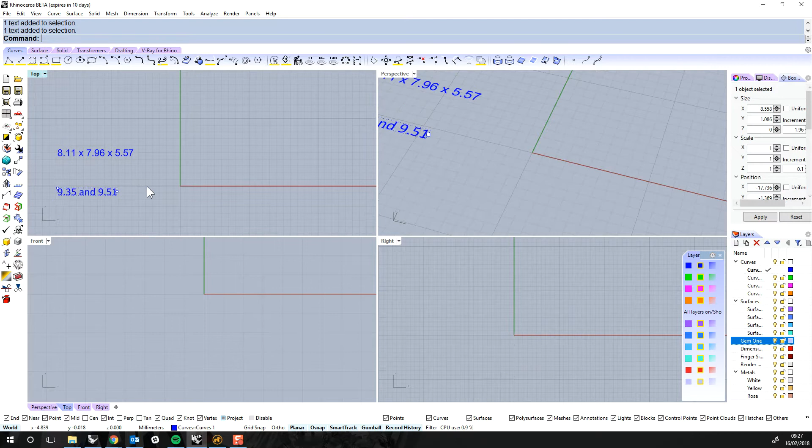So I've got this job here. I need to make a design, a ring with this Asscher cut here. So I've got the length, width, and depth, and I've also got the diagonal measurements. So it's quite a decent gem, it's about 3 carats or so. Let's start with a rectangle. And I'm going to go for 7.95, 8.1, and let's pop that in the center.

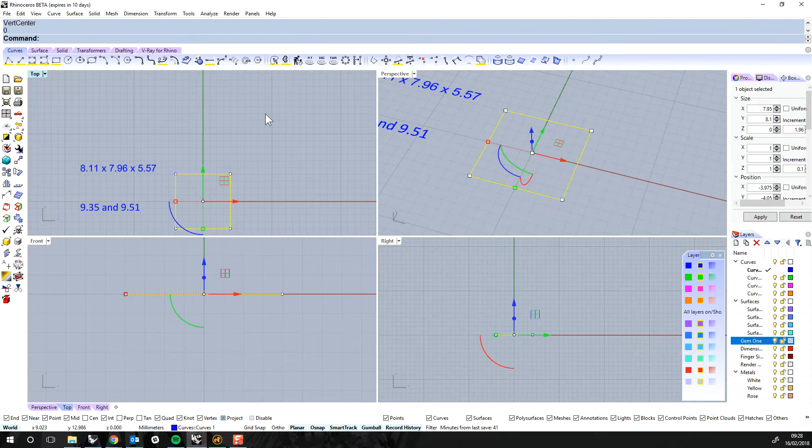And another way of doing that, that's just my little shortcut, is just hitting align. And you want to align to the horizontal center at 0. Hit that again, vertical center at 0. So 0 is just an easy way of saying that's the world origin. So 0, enter, is the world origin. And that's where those 2 lines, or 3 lines, all converge.

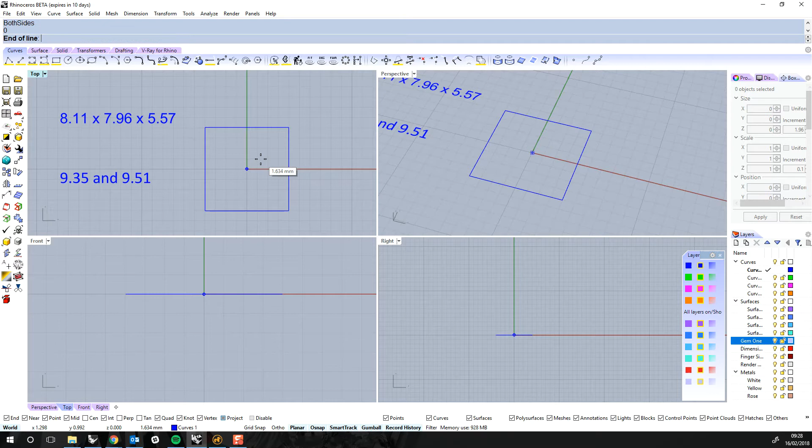Let's grab our diagonal measurements. Line, both sides, and again come from 0. And I want to snap to those corners there. Now 9.35, I only want half of 9.35, because I'm only drawing from the center out. So 9.35 divided by 2, and that saves me the mental drain of having to figure out what half of 9.35 is. Let's hit that there. You can see it's actually 4.675 millimeters.

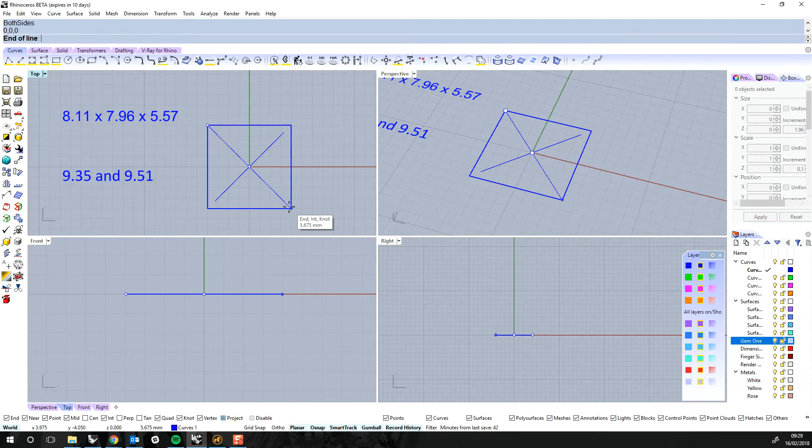And again, we can check the length of that line, 9.35 millimeters. Perfect. Again, line both sides from origin, 9.51 divided by 2. And we can bypass that. You can see if we hover over that, it gives us the tooltip saying if we right click, it's going to give us the line both sides option. So right click. Now my ortho snaps are set at 45 degrees, so if I hold down shift, it's going to constrain this line to 45-degree angles.

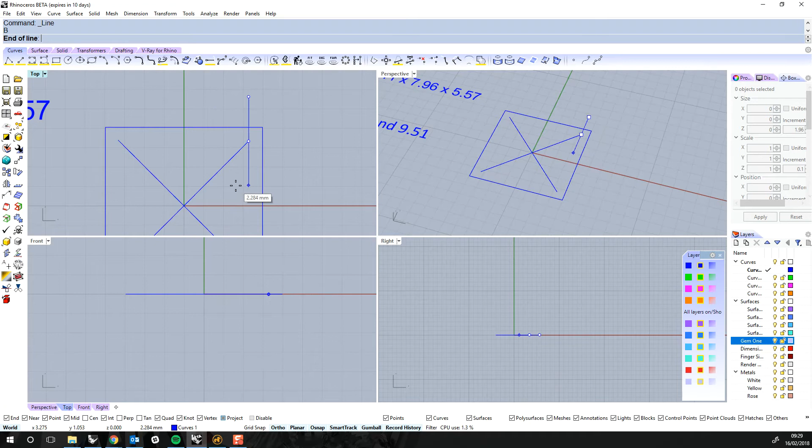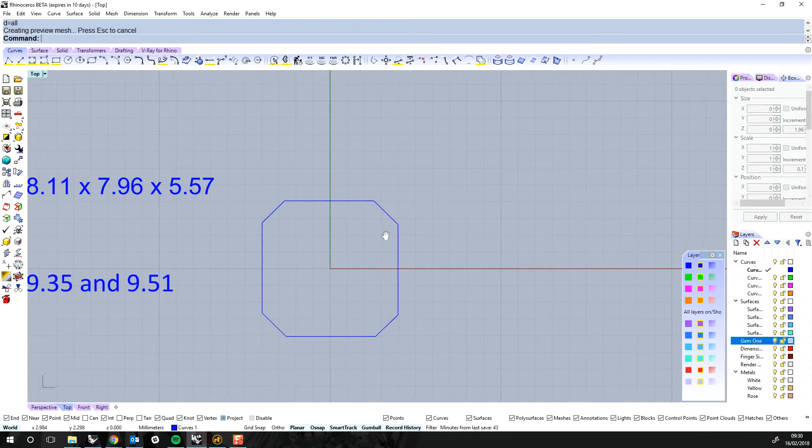Let's do that for all of those end points on those center lines and get rid of those 2. And we can trim these off. Trim, trim, trim, trim. That gets a bit boring after a while. So we can just cheat and grab curve boolean, and it says click inside the region you want to keep. I want to keep that. It says enter when you're done. I'm done. Enter. And that's going to trim off all those excess bits hanging outside of that area that you want to keep. Also going to join that up into a nice continuous polyline. Grab our properties here. That's a nice closed curve.

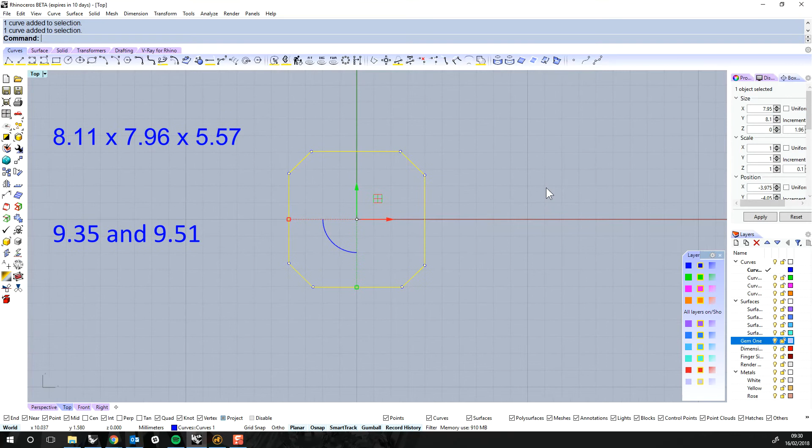And again, let's go back to our box edit. You can access this by right clicking any one of these tabs. You can see the options that you can have pop up. Box edit's one that I always have up. Nice easy way of just grabbing a quick dimension on whatever object you've got selected in your scene. Okay, so 9.35, 9.51, we know that the corners are in the right place.

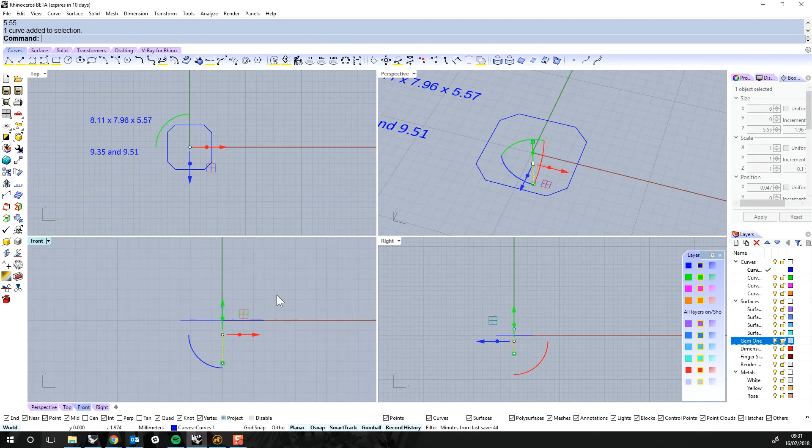And I have a depth here of 5.55. 5.55. Enter, and again hold down shift to constrain that vertically. Now that has missed. 5.55. That's better. And we'll drag that up. Sorry, that previous one had missed the world origin. I'm not sure why.

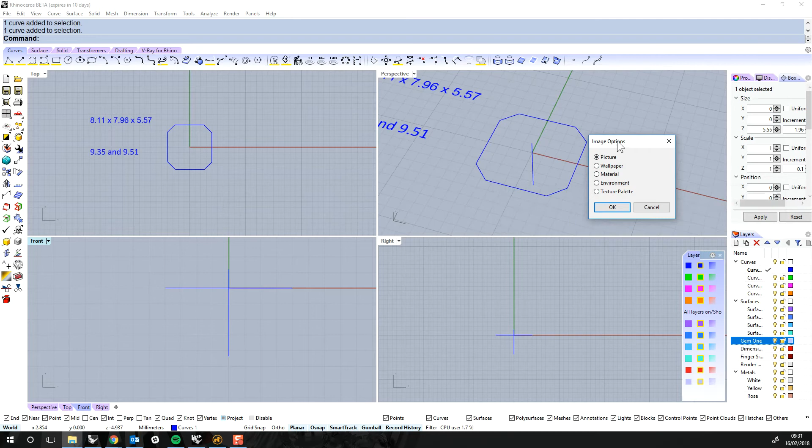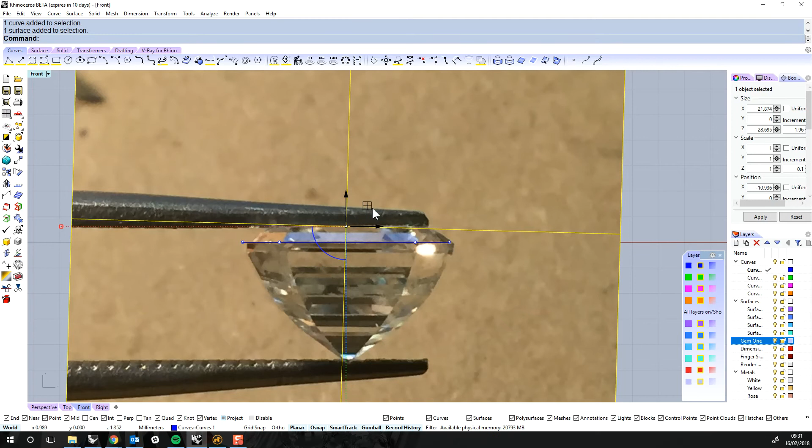And I do have a side image of the diamond here. We can just drag that in as a picture. And there it is. Move that into place. Give it a little rotation. Straighten it up. And I'm just trying to get the image to line up with that line. That looks pretty good to me.

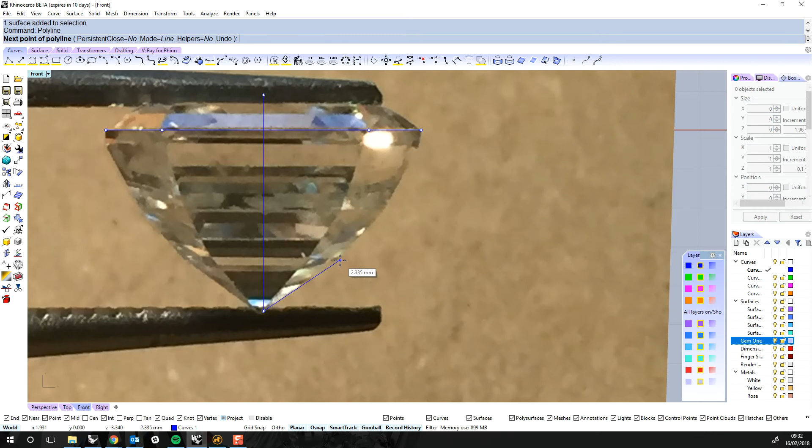When you look at this photo, you can see there's 1, 2, 3, I guess 3 pavilion facets here, and maybe 1, 2 on the top. So this time we're going to go with polyline, P-O-L-Y, and you can see it's auto completed for me. Grab this culet. That's the first facet, second facet.

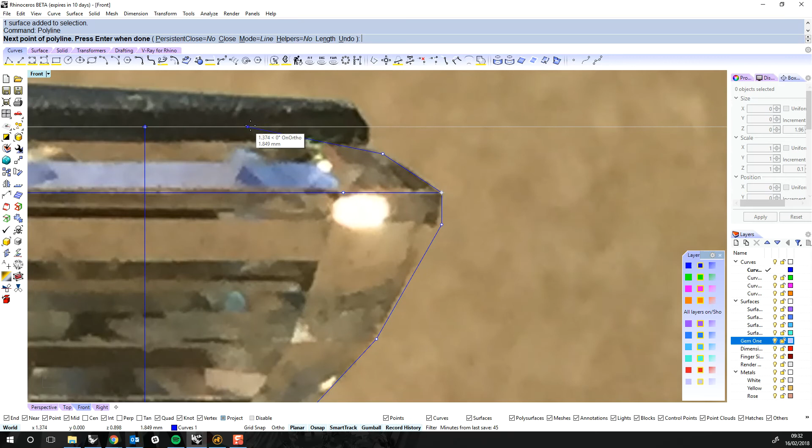Now I've got my smart track on here. If I hover over that point there, it's going to turn white. That means I can just drag a line down. That's going to be constrained to a nice 90-degree angle. Take this over here to that facet, and again to about there, and close that up. We can delete that, and we can see that this profile here is 5.55 millimeters.

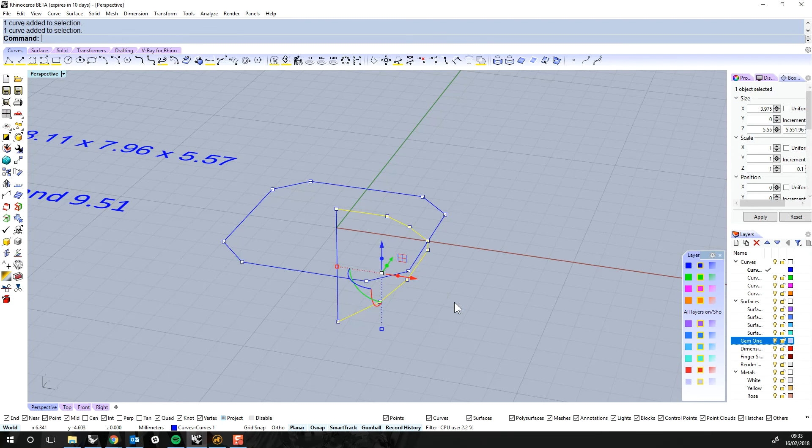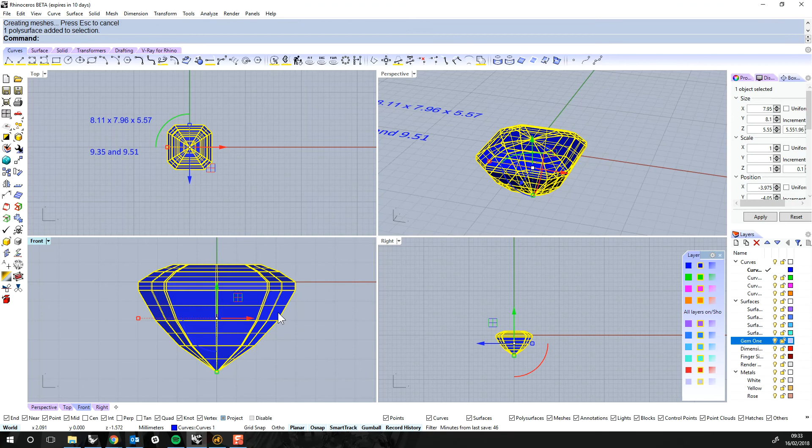So how do we get a gem from this? Okay, well we've got our outside curve, we've got our profile, and we just want to do a rail revolve. So rail revolve, select profile curve. This is this one here. Select the rail curve, this one, start of axis, and we just want anything on that vertical line really. So that one, hold down Shift, and there it is. That's our gem. Change object layer to my gem layer. So we've got a nice accurate gem there.

So when I model the ring, we know that that gem is going to sit nicely into the seat. I know that when I put my claws in, they're going to sit nicely on the corners. They're not going to bite. The girdle isn't going to bite too far into the claws, or be cut back and leave a gap.